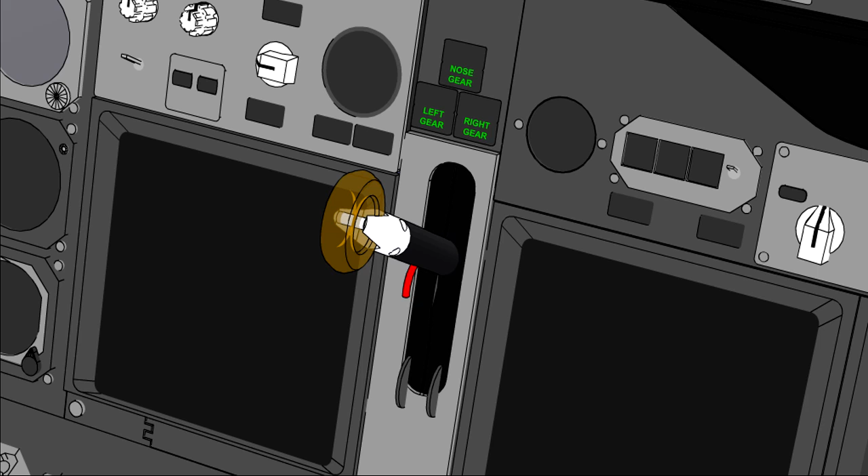In this lesson, we will look at the indicating systems used to keep the crew informed of the position of the landing gear. We will then look at a typical hydraulically operated landing gear extension and retraction sequence.

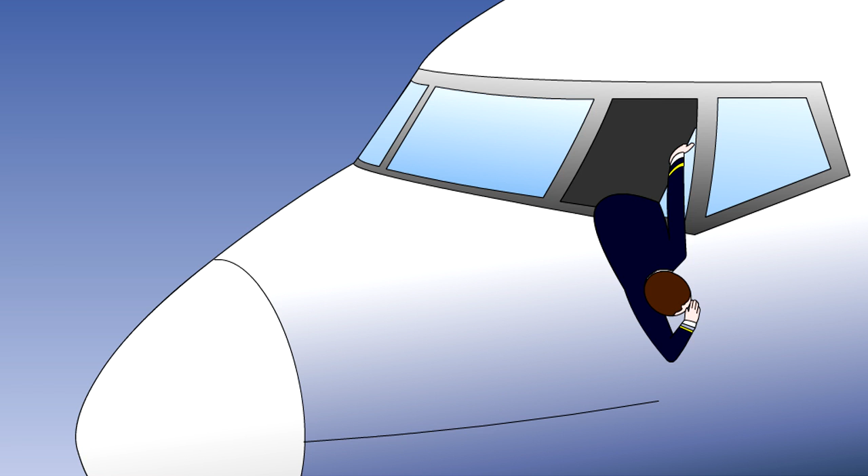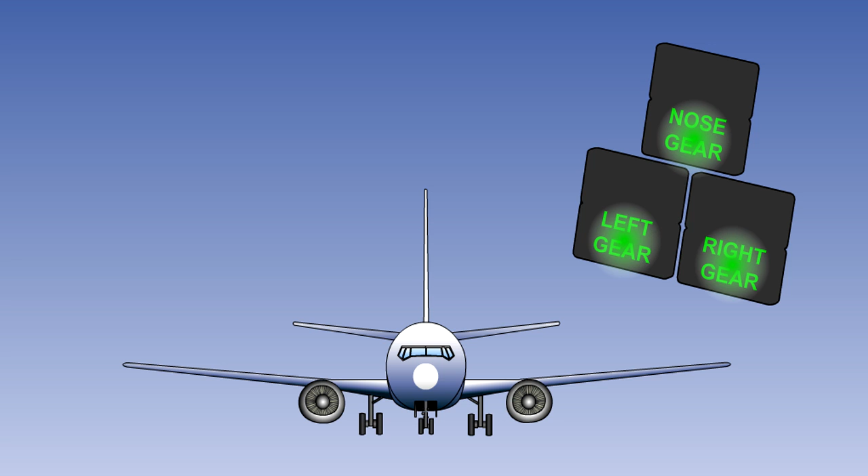Although the landing gear, when selected down, may be at least partially visible from the crew compartment, it is not usually possible to be certain, by looking at it, that each landing gear is securely locked down. An electrical indicating system is used to provide a positive indication to the crew of the operation of the locks and the position of the landing gear.

The system usually consists of microswitches or proximity sensors monitoring the up and down locks. These make or break electrical circuits when the locks operate, causing indications to change on the landing gear position indicator on the instrument panel.

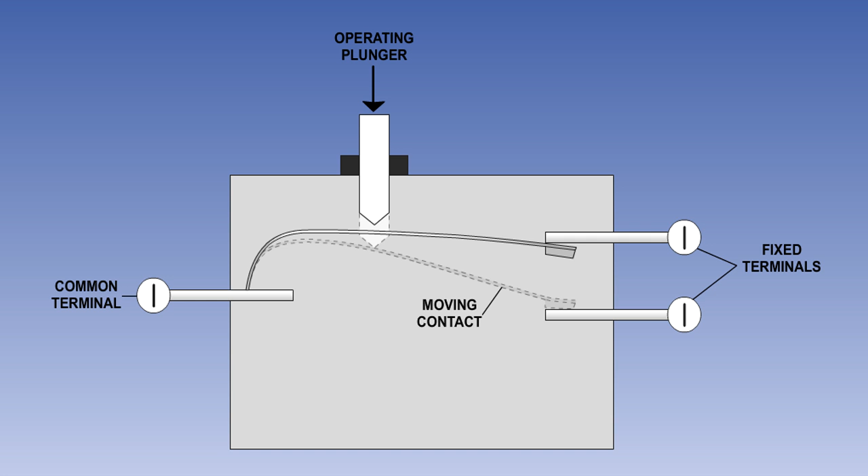Microswitches are simple, mechanically operated electrical switches, which are operated by a striker plate when the gear reaches the required position.

Most modern aircraft now use proximity switches. These are electronic devices with no moving parts. Each proximity switch consists of two components, a sensor and a target. When the sensor and target are in close proximity, a switch will be made.

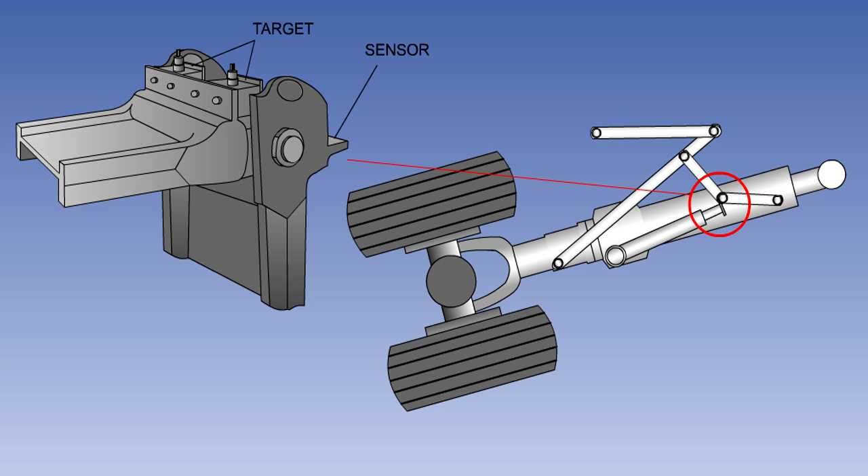The picture shows the proximity sensors on a gear-down geometric lock. When the jury struts move to the over-center position, the sensor and the target move into close proximity, and a gear locked down signal is sent.

The sensors are usually duplicated for safety reasons. Microswitches and proximity sensors are fully explained in the electrical systems lessons.

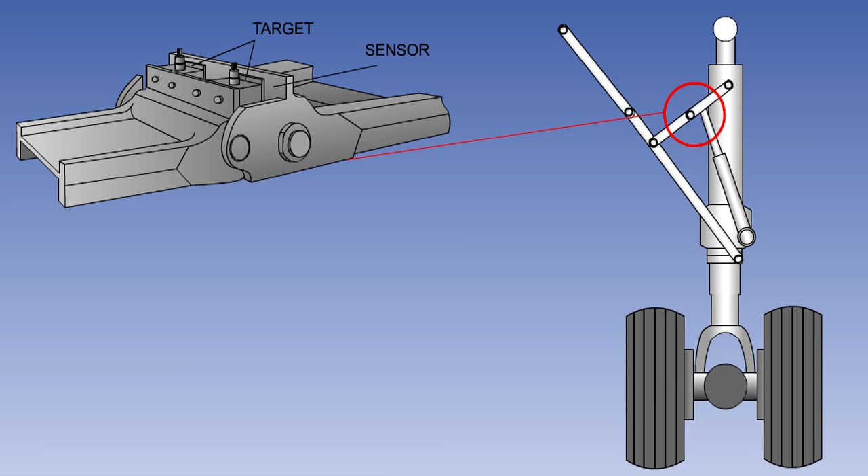Mechanical indicators may also be provided to show that the landing gear is down and locked if the electrical indicating system fails. For the main gear, these are often just buttons, which pop up on the top of the wing when the gear is locked down. They can usually be viewed from the fuselage windows.

The nose gear will often have some sort of periscopic viewer in the cockpit floor through which the downlock can be seen. Some aircraft don't have mechanical indicators. Instead, they have duplicated electrical downlock sensors.

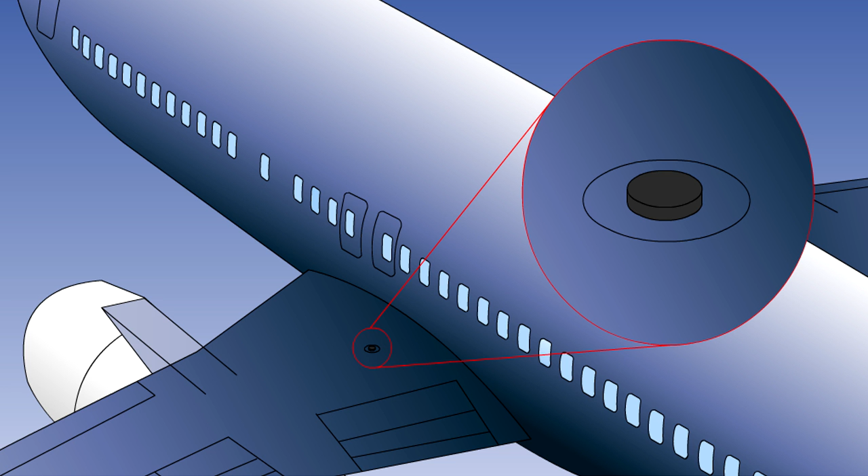On most modern aircraft, the electrical landing gear indicating system operates in such a manner that a green light is displayed for each gear when it is locked down. A red light is displayed when the gear is not locked in the selected position, and no lights are visible when the gear is up and locked.

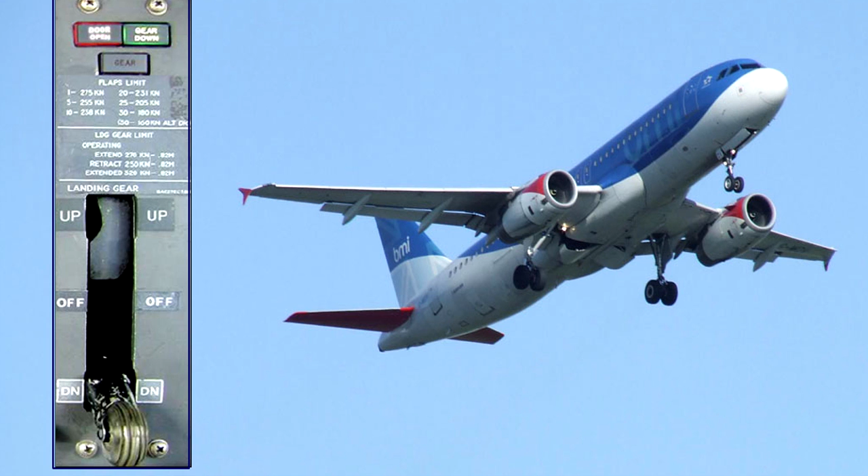Bulbs are usually duplicated to avoid the possibility of false indications as a result of filament failures. Many large aircraft also have main gear door lock indicators to indicate that the hydraulically operated doors are closed and locked. These lights may be red or amber.

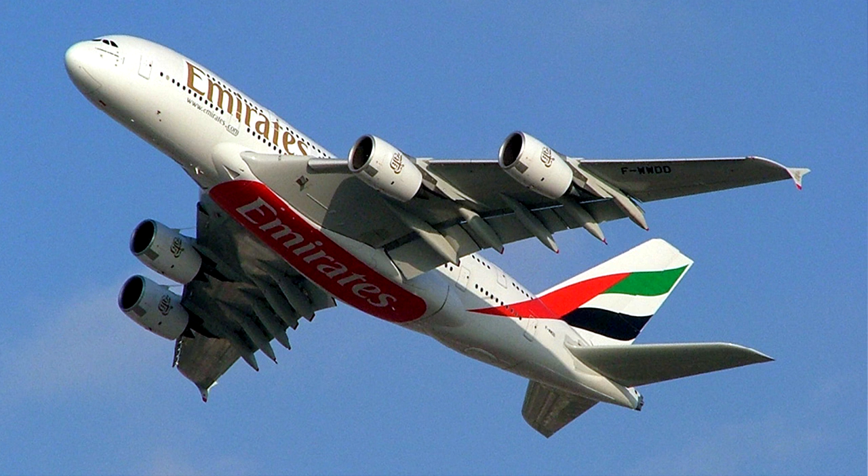Landing gear retraction systems can be hydraulic, electrical, or pneumatic in their operation. Here we will explain the operation of a hydraulically operated system. Pneumatically and electrically operated systems function in a similar fashion.

Most modern commercial aircraft have hydraulically powered landing gear systems. The hydraulic power is normally supplied by the engine-driven pumps. There will be a backup system available in case of pump or engine failure.

On some light aircraft, a self-contained power pack is used. This houses a reservoir and selector valves for the landing gear and flap systems. An electrically driven pump may also be included, or the system may be powered by engine-driven pumps.

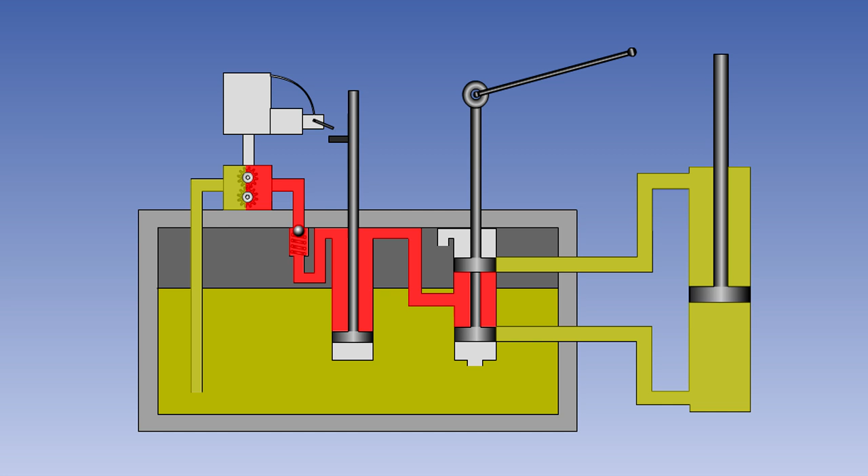The diagram here shows a typical hydraulically operated main gear in schematic form. It has a number of components that were described fully in the hydraulic systems lessons.

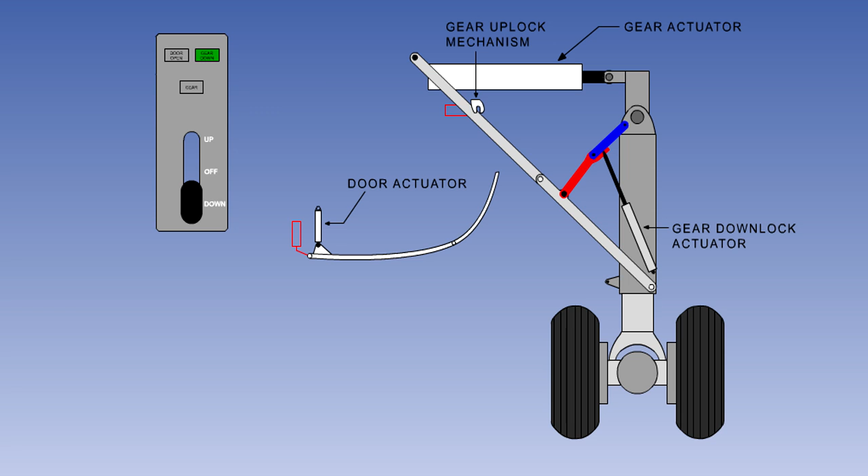The gear actuator and door actuator are double-acting unbalanced actuators. The gear downlock and uplock actuators are spring-applied and hydraulically released. The gear is locked down by a geometric lock mechanism. There are two sequence valves controlling the sequence of gear and door operation.

The two hydraulic lines from the selector are known as the up line and the down line. The up line is pressurized when the gear is selected up, and the down line is used for return fluid. The roles are reversed when the gear is selected down.

The door is hydraulically opened and closed. It is closed when the gear is locked up or down. It opens to allow the gear to raise or lower.

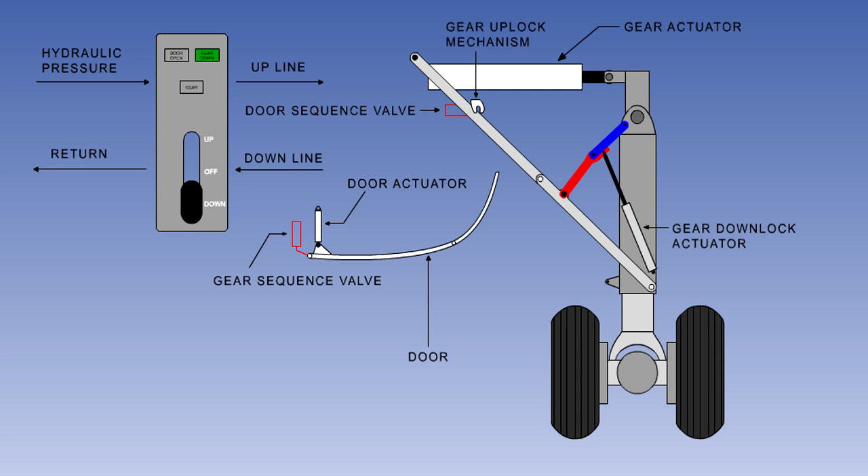We will now look at the sequence of gear and door operation and the associated lights indications that you can usually expect to see on a modern airliner. For simplicity, we have only shown one main gear. However, the other main gear and the nose gear operate in the same manner.

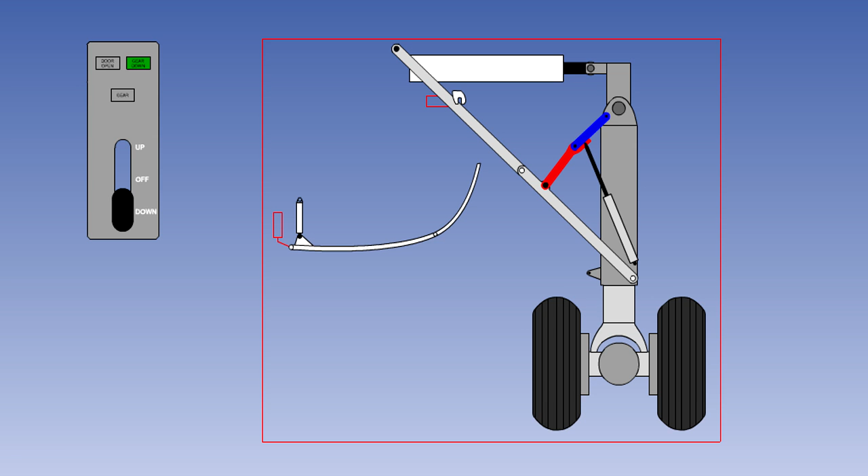The gear lever will be within easy reach of both pilots, and the gear indicator lights are usually adjacent to it. The lights indicate the status of each individual gear. For simplicity, we will only show the lights for one gear when looking at the gear sequence.

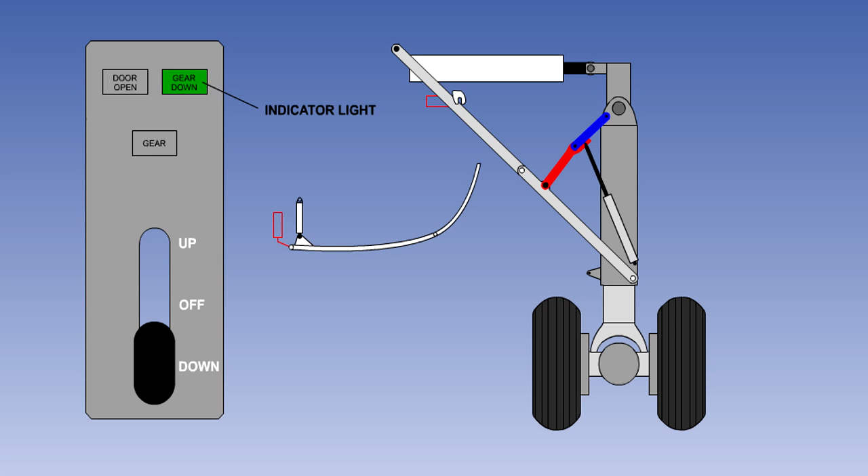With the gear lever in the down position and the gear locked down and the hydraulically operated doors closed, the green gear down light will be on and the door open light will be out.

The gear red light is a disagreement light. It illuminates at any time the gear and the lever are in disagreement. So when the gear is selected up, the first thing that happens is that the gear red light illuminates. However, the gear is still locked down, so the green gear down light remains.

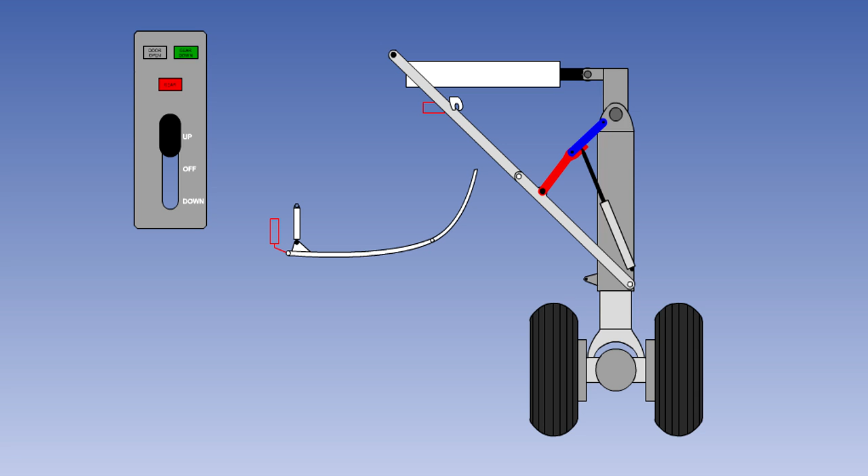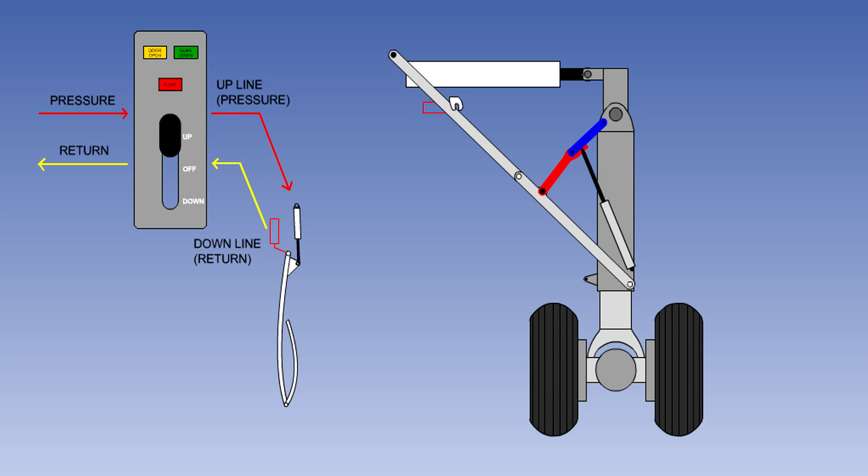The selector valve controlled by the gear lever will send pressure fluid to the door actuator. The door now begins to open and the door open light illuminates. When the door is fully open, its gear sequence valve will redirect the pressure fluid to the gear downlock actuator and the gear actuator.

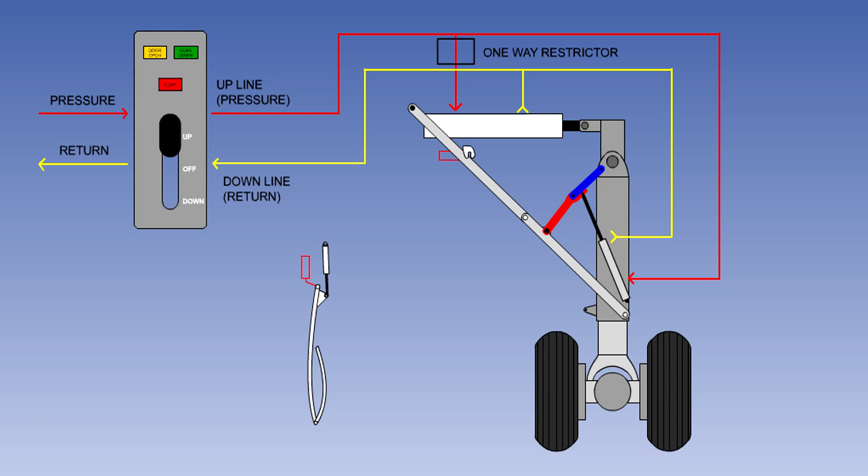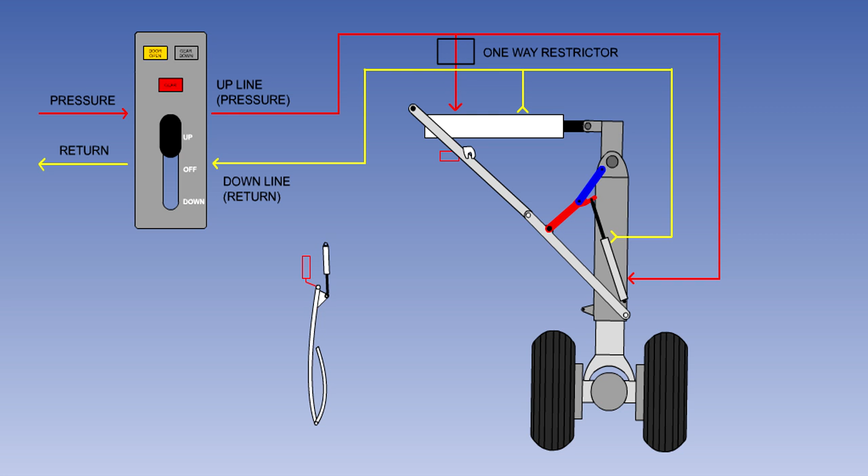The pressure fluid passes through the one-way restrictor valve in the full flow direction. The downlock actuator will begin to retract, breaking the geometric lock. The gear is now unlocked, so its green gear down light will go out. The gear actuator can now raise the gear.

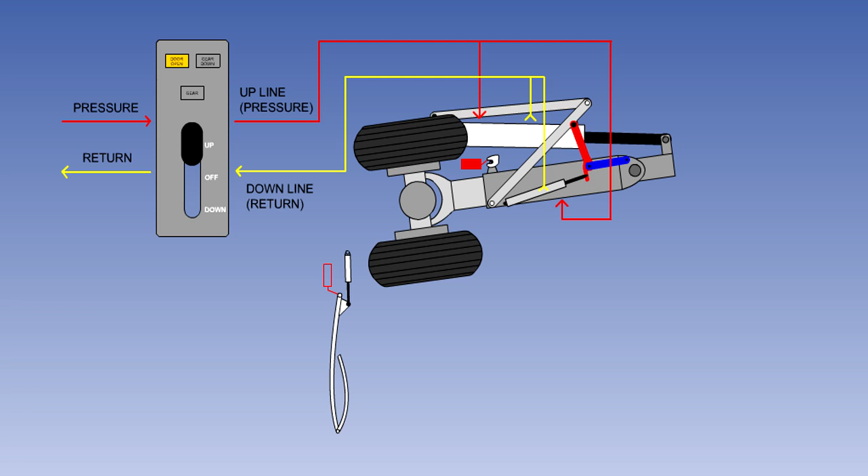When the gear is fully up, the uplock roller will engage with the uplock hook, causing, with spring assistance, the hook to rotate, locking the gear up. Once the gear is locked up, the red gear light will go out.

The door sequence valve now directs the hydraulic fluid to the door actuator, and the door closes. Once it is fully closed, the amber door open light will go out. With the gear up and doors closed, there will be no lights on the indicator.

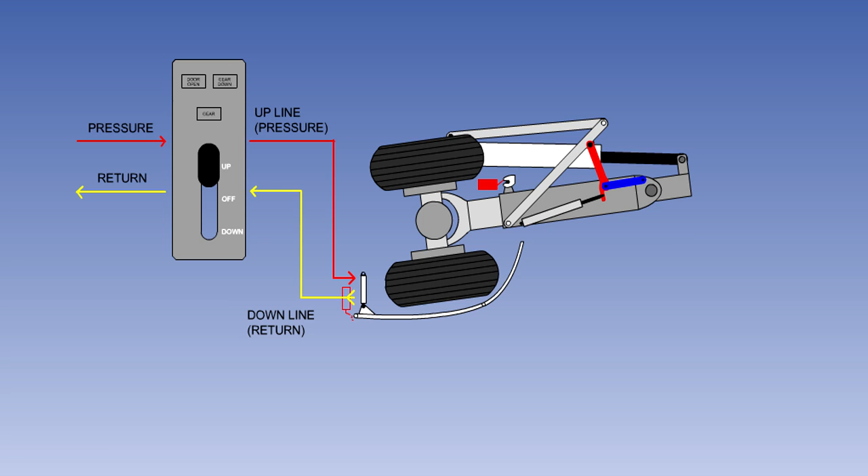Once the gear is up and locked, and the door is closed, the gear lever is placed to the off position, leaving the gear unpressurized for the period of the cruise, so extending the life of the landing gear components and preventing unwanted leakage of hydraulic fluid.

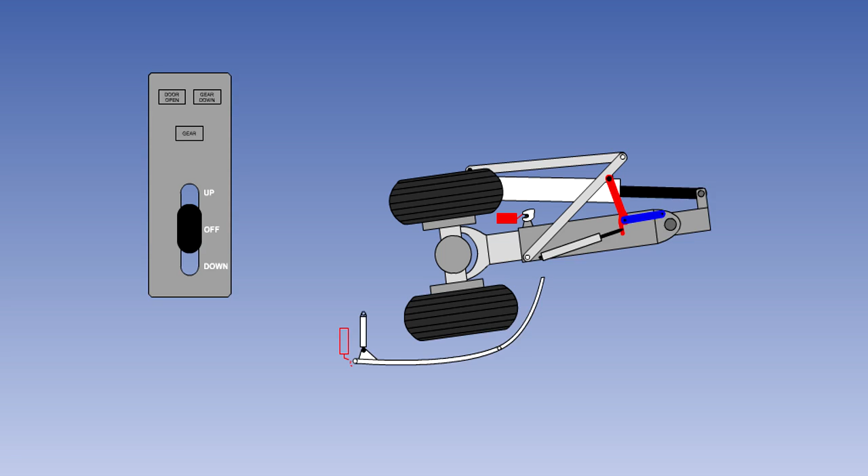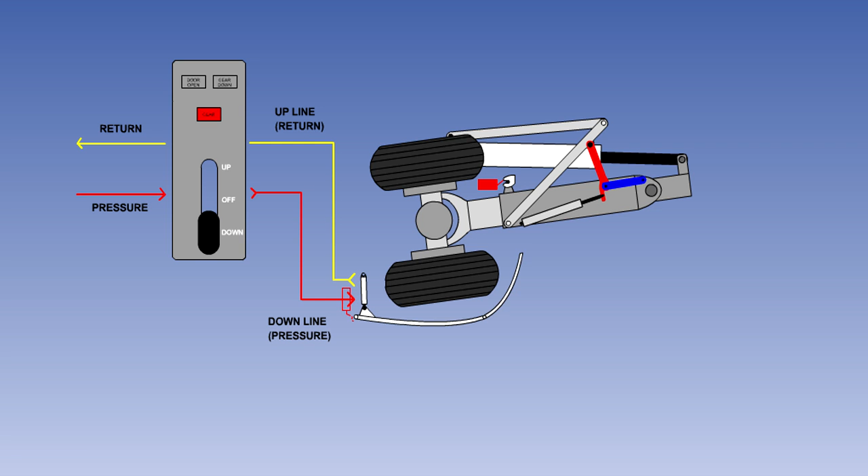The sequence when the gear is selected down is basically the up sequence in reverse. When the lever is selected down, the red gear light comes on to indicate a disagreement between the lever and the gear. At the same time, fluid is directed to the door actuator. The door will open and the door light will come on.

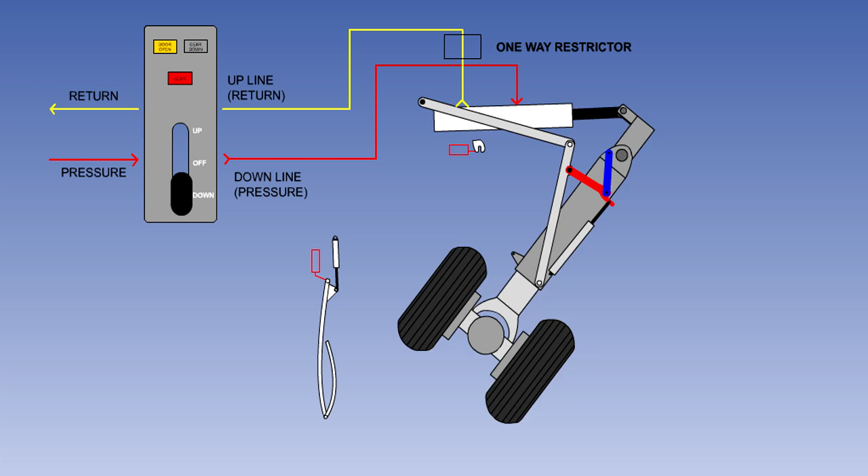When the door is fully open, the gear sequence valve will redirect the hydraulic fluid to the gear up-lock actuator and the gear actuator. The up-lock mechanism will rotate, releasing the gear. The gear actuator will now lower the gear, assisted by the weight of the gear.

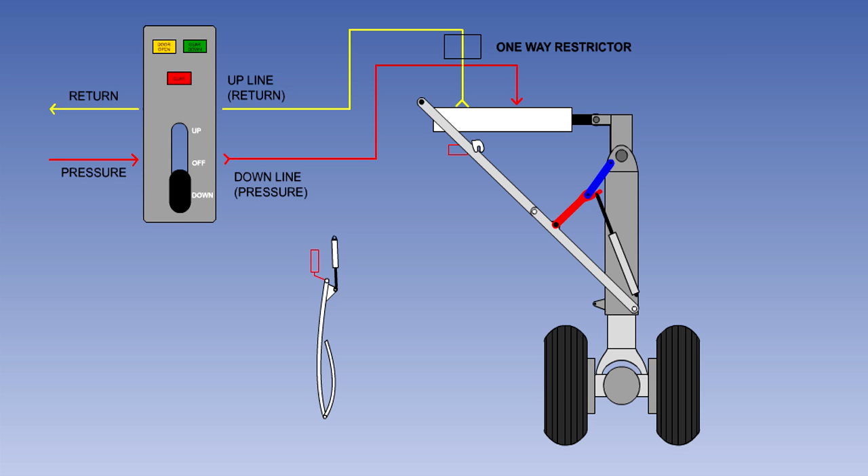To control the speed of lowering, the return fluid from the gear actuator passes through a one-way restrictor valve in the restricted flow direction. You may wonder why the restrictor is in the up line and not in the down line. When the gear is going down, pressure fluid is passing through the down line and the up line is used for return.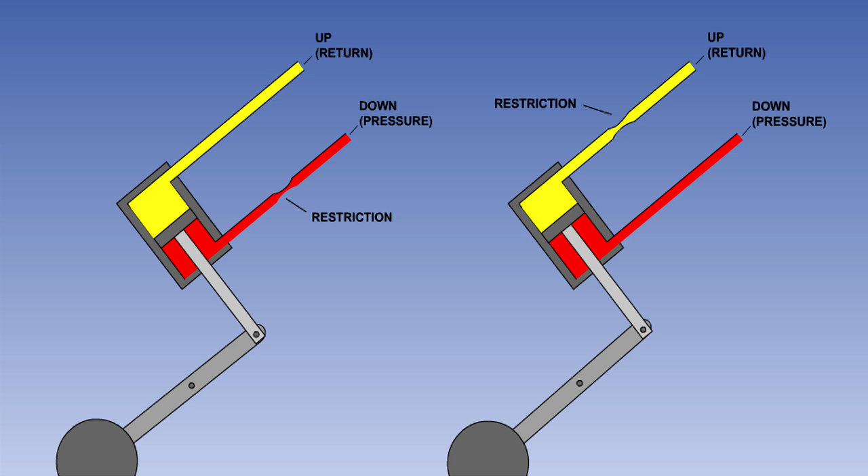When the gear approaches the fully down position, a powerful spring in the lockdown actuator will push the geometric lock over center, locking the gear down. The red gear light goes out, and the green light comes on.

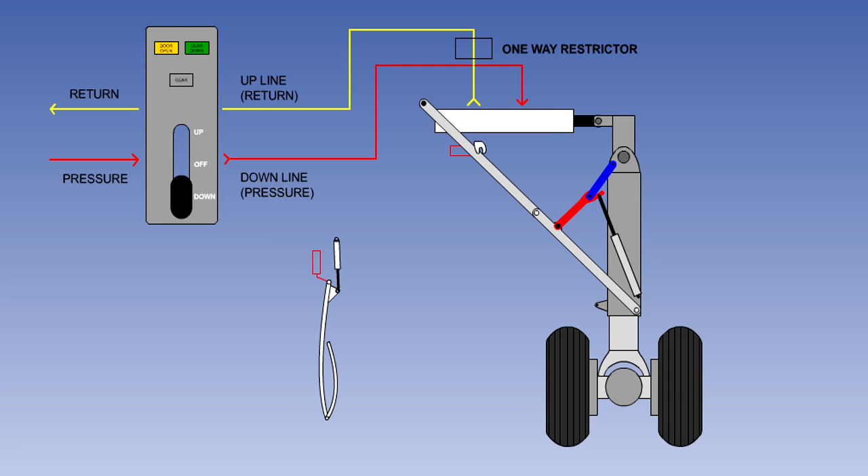Once the gear is locked down, the door sequence valve directs fluid to the door actuator, and the door closes. The door light goes out.

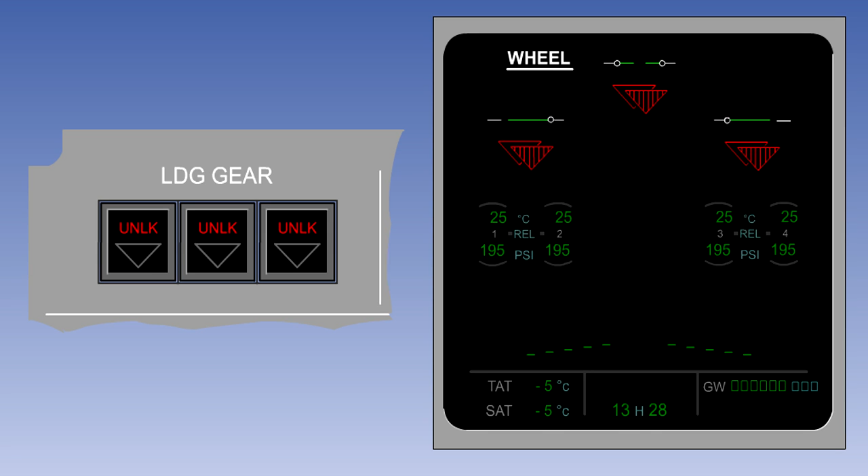When the gear is locked down, there are green down-pointing triangles on both the undercarriage indicator and on the ECAM screen. When the gear is neither locked up nor down, the triangles on the ECAM screen are red and unlocked is displayed on the landing gear indicator. And when it is up and locked, the displays are blank.

The door positions are depicted by the symbols highlighted here. They are green when the doors are locked, closed, and amber when they are not.

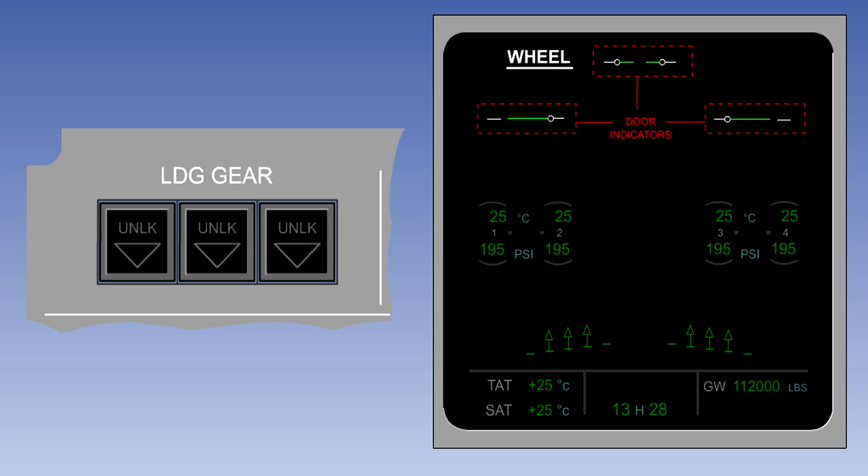To summarize gear indications, the most important indication is for gear down. This is almost invariably indicated by a green light or lights. Red lights are normally used to indicate that the gear is not locked in the selected position. And lights out usually indicates gear up and doors closed.

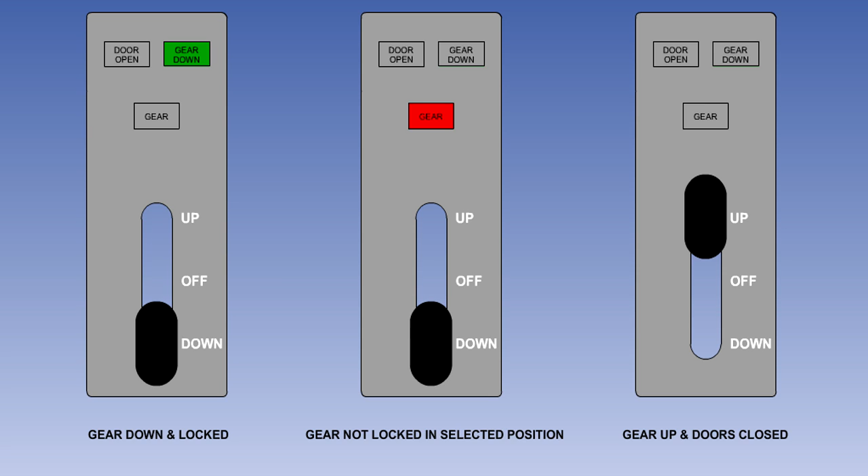You should now have an understanding of how undercarriage extension and retraction is accomplished hydraulically, including the purpose of the sequence and one-way restrictor valves.